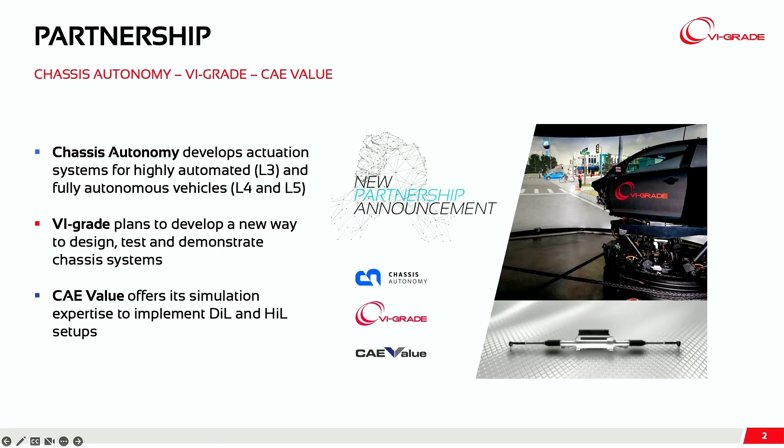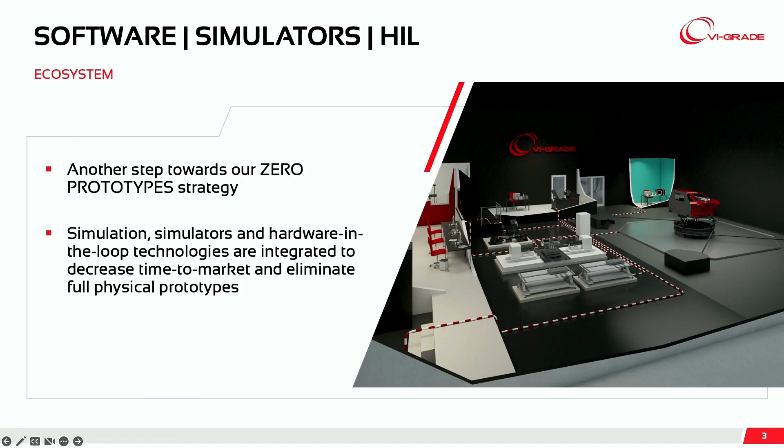This is why, when I met this company, Chassis Autonomy, I immediately thought it was a good idea for VI-grade and also for our Nordic partner, CAE Value, to have a partnership with them. They are actually changing the way chassis will be driven, developing a new type of steering system. I immediately thought it was a great idea to make a partnership and work together to change the way this kind of system can be developed, but also how it can be demoed to potential customers using simulation tools, hardware-in-the-loop tools, and driving simulators. So we've signed a partnership with Chassis Autonomy and CAE Value, where I see a lot of synergies to change the way these systems are developed and demonstrated to potential customers. So I'll let you move forward with your presentation.

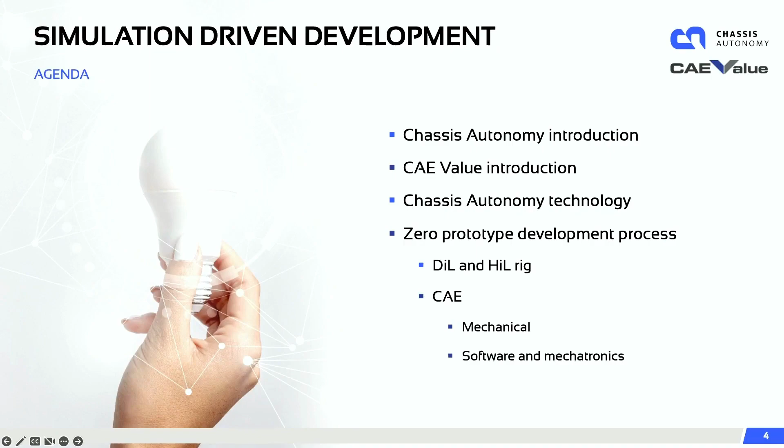Thanks, Guido. So we'll run through an introduction on Chassis Autonomy, where we've come from in the short period of 18 months since we incorporated, where we are now, and our vision of where we're going, and how we can even start to think that we can challenge the big legacy tier ones - the Bosches, the Contis, the ZFs. I'll hand over to Johnny - he'll give you a bit about CAE Value, the expertise, the competence, and why working with CAE Value, Chassis Autonomy, and VI-grade is just such a natural partnership. I'll then go a little into Chassis Autonomy, the technology, the fail operational steering systems we're developing, and then we'll focus a bit on the development process, the zero prototypes, and that's why we're all here - to really push through the simulation.

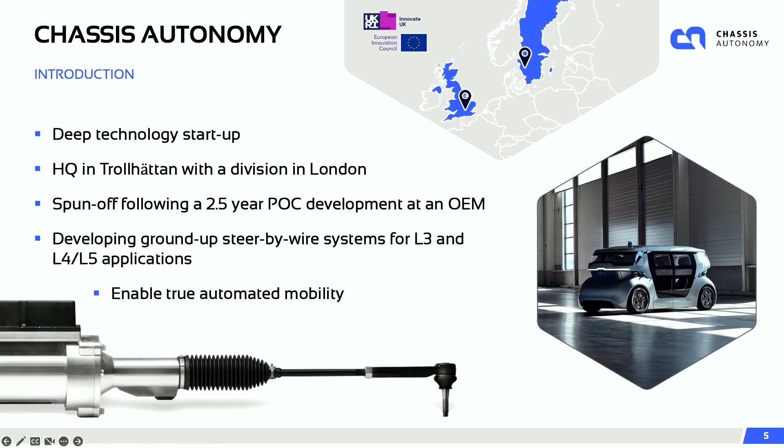So a little bit on Chassis Autonomy. We're a deep technology startup headquartered in Trollhättan, Sweden, with a division in London, UK. We spun out of a Swedish OEM 18 months ago, but our history and the technology we're developing actually started in 2018, when we were working for the Swedish OEM. We were tasked with developing or finding a solution for steering systems and braking systems specifically for that autonomous vehicle you can see there. After a 3-month investigation discussing with the big legacy tier ones, it was very clear they either weren't willing to or were unable to support us with our mission. So we developed a new division within the OEM and started developing steer-by-wire and brake-by-wire specifically for autonomous vehicles. 2.5 years later, we achieved proof of concept with that fail operational steering system equipped to that test vehicle, front and rear axle, and until quite recently it was still being evaluated around a test track up in North Sweden. We spun off specifically that technology.

We're an independent company - really the vision is to enable autonomous mobility through the provision of fail operational actuation systems. We've had significant traction in the short period we've been operating: significant government grants from the European Union, the UK, and significant financial investment from private investors. We've got key strategic partnerships, like the one we're talking about today. That traction means now we're not just focusing on level 4, but we've got customers for level 3 applications. So we're developing and deploying the road wheel actuator with a hand wheel actuator for human-driven applications - something we didn't envisage when we spun off the company. But such is the traction and the technologies we've got, there's demand, and we intend to fill that. So our original tagline was 'enabling true autonomous mobility,' but now it's 'enabling true automated mobility,' because we're also looking into highly automated level 3 applications. That's a little bit on Chassis Autonomy - I'll hand over to Johnny.

He'll tell you a little about CAE, and then we'll move on to steer-by-wire. Thank you, Tom. So, hello everybody. In fact, I'd like to start with a small story.

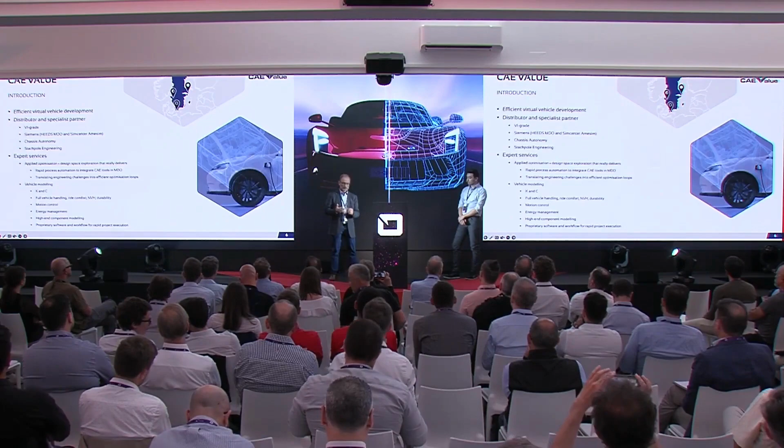The second thing we do really well is being able to model any vehicle in great detail according to what is needed in each phase of the vehicle program. So we do vehicle dynamics, NVH, durability, motion control, energy management, and stuff like that. And of course, we developed some in-house tools over the years to make our process more efficient.

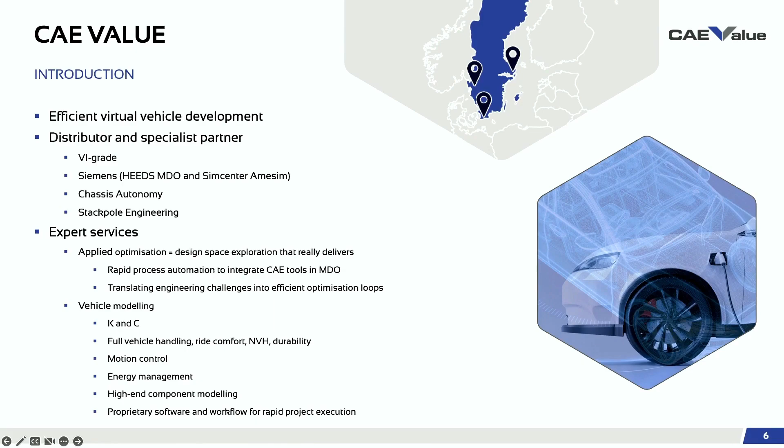Over to you, Tom. Thanks, Johnny.

So a little bit about the technology. When we remove the mechanical connection, either from the steering column or the brake pedal, we need to make sure the system's functionally safe. This has been talked about for the last 20 years. Technology is slowly getting there, but there are still struggles from the legacy tier 1s. But ultimately, our challenge is to develop the world's most safe actuation system, braking and steering.

Our focus currently is on steering, really underpinning the design and the concept with functional safety. To do that, we've assembled a world-class team. We've got headquarters in Sweden, an office in London, and engineers across Europe. Where we can't get the talent in our local division areas, we'll go elsewhere to make sure we get the best people in the world. That's the world-class engineering team we've got.

When we start to actually look at the design, because we're not a legacy supplier, we don't have manufacturing facilities across the world, and we don't have to carry over existing technology, we can design from the ground up. So we can have a functionally safe electronics and software concept, and that's exactly what we've got.

When we look into the mechanical design, again we design from the ground up. We eliminate conventional concepts, we eliminate the established parallel axis drive, which has got a belt drive, a single point fault of failure, which is really catastrophic for a by-wire system. We also look into the concept, and for a steer-by-wire system that doesn't need a mechanical connection by definition, why carry over a 16th century technology such as the rack and pinion? Again, we delete that. What we end up with is a very robust design, mechanically robust, functionally safe in terms of electronics and software, and a system specifically designed for use in by-wire applications.

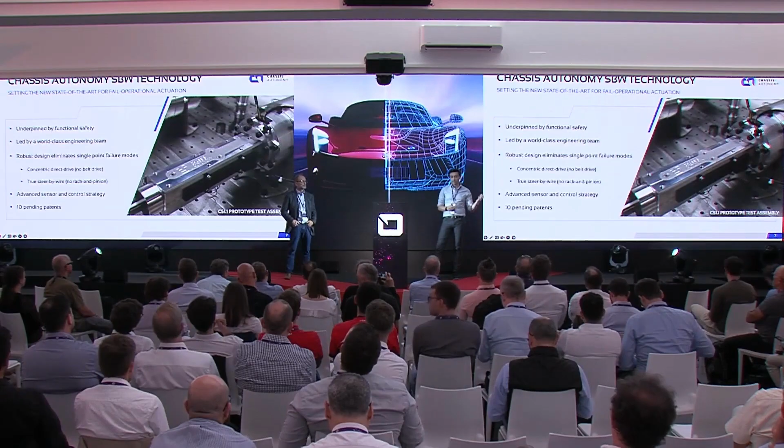Added to that, the sensor concept. In the design, we've got an advanced sensor concept and control strategy that makes sure we have plausibility and redundancy. In most events where we have a system fault, we revert to an alternative operating mode, maintaining steering functionality and steering availability.

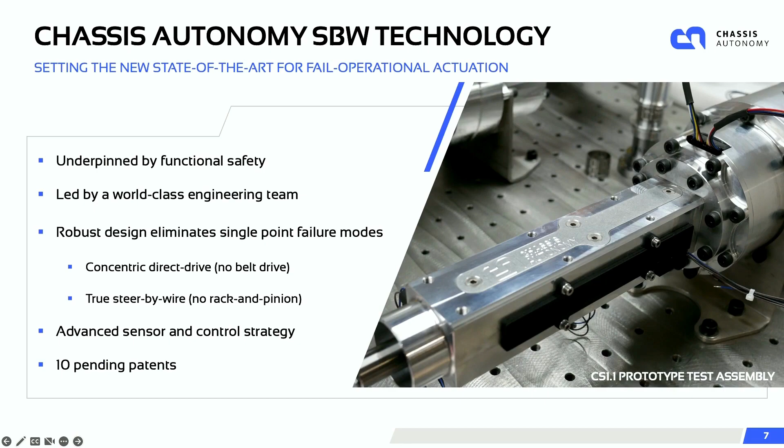Everything that we've designed in the concept and the product, we've got 10 patents pending. If you ask me tomorrow, that'll be 13. So again, we're pushing the boundaries, creating new technology, and there's clear white space around what we're doing.

Moving to level 3, we've developed a functionally safe product on the electronics, the software, the mechanical design is robust. The next critical challenge, I think, as we all know, is that steering feel - how do we make sure we translate the road feel into the road wheel actuator, through the wires, up to the hand wheel actuator. That's the biggest challenge as we move into level 3.

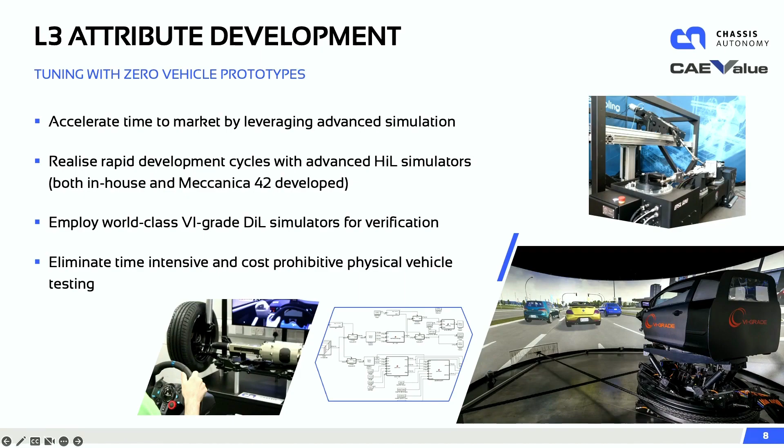That's really where the partnership with Johnny, CAE Value and VI-grade helps us accelerate the development through the use of hardware-in-the-loop simulators, to really advance the development of the system, the algorithms, the software, before we even need to manufacture a prototype and put that on a vehicle. That really advances time to market, reduces cost. It's fundamental to how we need to develop products, and that's pretty much why everyone here today is here - because of the zero prototype concept, and we're fully bought into that to develop the product.

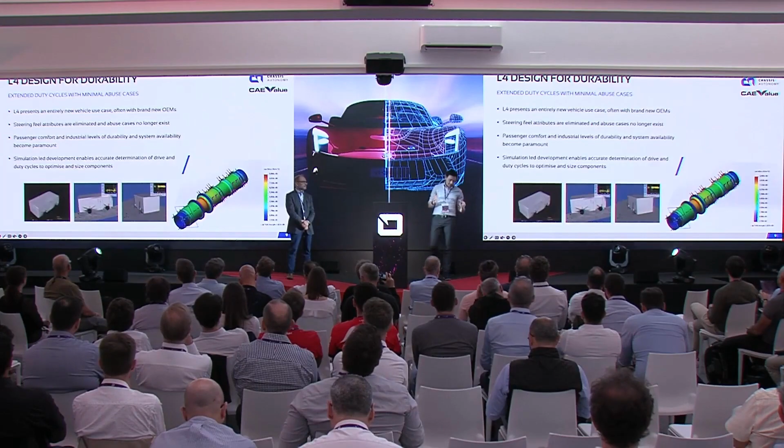Level 4 is a little bit different. We've got the road wheel actuator. We don't need to worry about steering attributes - they're out the window. Same case with abuse cases, so the human driver, that 1%, we don't need to worry about that. So we have a different design case, a different duty cycle, different road loads potentially.

And we're also working with, in most cases, pretty new startups - well-funded startups, lesser well-funded startups - companies that potentially don't have the road load data, the design data to feed into requirements to allow us to optimize the system. So again, through simulation, we can capture that road load data from ODDs, we can define duty cycles, we can optimize the system, make sure it's designed specifically for that application.

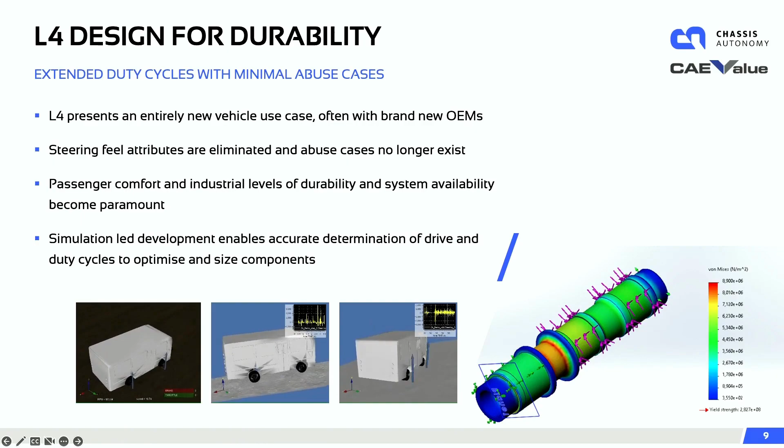And now over to Johnny, he'll talk a little bit about the digital twin and really how we're crossing the divide between the hardware in the loop and the software.

Thank you, Tom. So I'd like to say a few words about what we call a digital twin of the steering rig. We have developed this model in Adams to be able to very precisely predict which will be the controller inputs and output signals, and what that means for the setup of the actual test rig. And then we can look at how do we optimize the feedback torque, how do we take into account the excitation coming from the wheels, from the tire model, and overall system dynamics. So we can use this model to prepare for when you put the human in the loop, in the rig, very accurately. We save time simply in the development by doing this.

And the other thing we can do with this type of model is, before running the actual physical durability verification, look at how this duty cycle should look and what kind of excitation we should use in order to minimize the physical testing time needed for verification purposes.

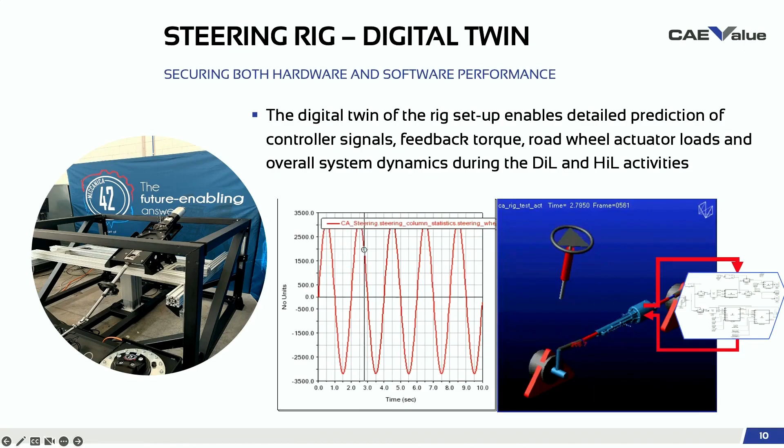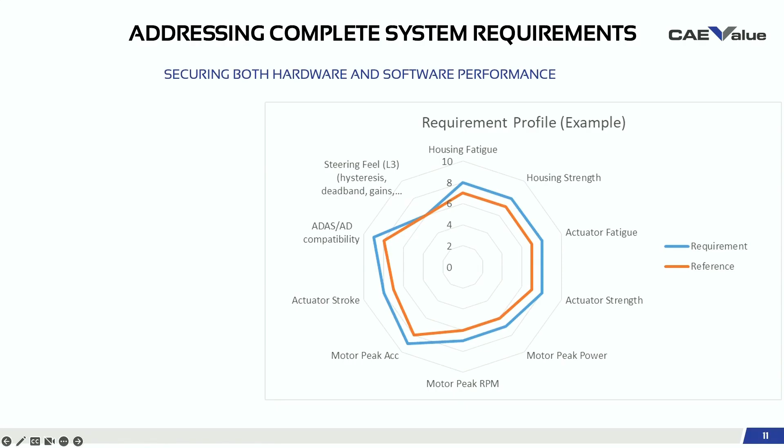So now I would like to talk a little bit about the challenges that Chassis Autonomy will see as a supplier. There are multiple different parts of this steering actuator that need to work together. It needs to be durable enough - the housing needs to be able to take shock loads and fatigue loads. Same thing goes with the actual steering actuator itself, and all the internal components. On top of that, you have a mechatronic system which needs to function properly and give enough performance, including the electric motor performance. So it's a lot of different things that need to fulfill multiple targets simultaneously, because there's no time to look at each individual component sequentially.

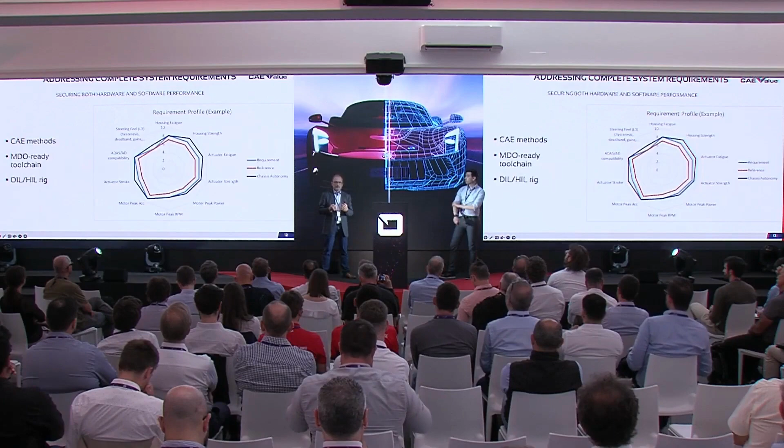So in order to overcome this, we're helping Chassis Autonomy put into place the right tools, the right methods, and prepare all these different models for a subsequent multi-objective design optimization, which we know will happen. For that, we have Adams models provided by Hexagon, we have VI-CarRealTime models that will be used both offline and online in the steering rig. So there's a lot of things that will work together. And once we start running the virtual multi-domain optimization, we use HEEDS MDO for that, clearly.

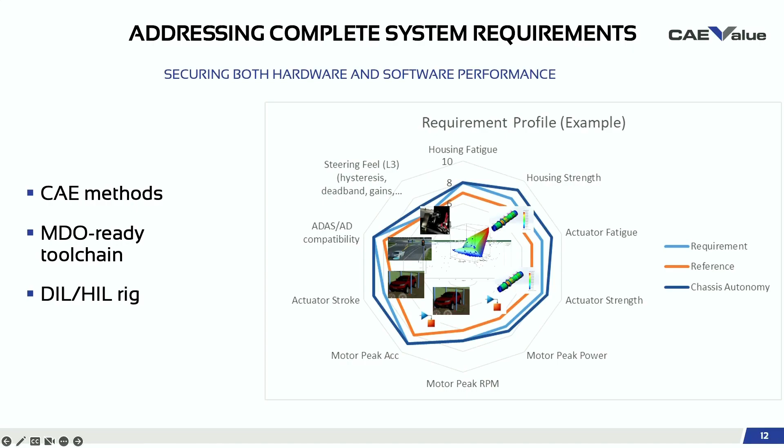I think with that, I would like to hand back over to Tom. Yeah, so just to summarize, this is a key partnership for all three companies. We will have a hardware-in-the-loop rig up and running by the end of the year, hopefully earlier.

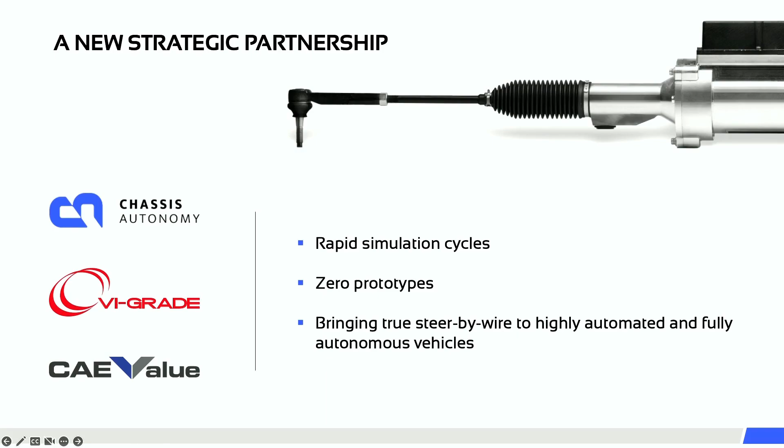And really that's focused on developing these rapid simulation cycles, focused on zero prototypes - that's what we need to do. That's how we accelerate development and ultimately bring steer-by-wire to highly automated level 3 and fully automated vehicles. As we move through that and execute it, then we start to focus on brake-by-wire as well. So thank you for listening, and if you've got any questions, please fire away.